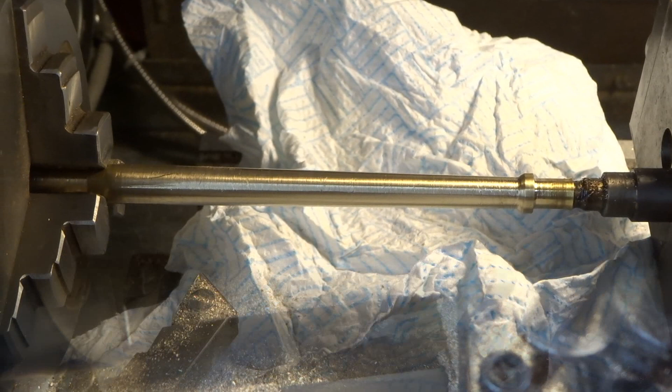Well, I'm not impressed with the finish, but I think for the moment I'm going to stop. Have a go at another one and see if we can improve. The tool's got a slight tendency to dig in and leave marks, which is not clever.

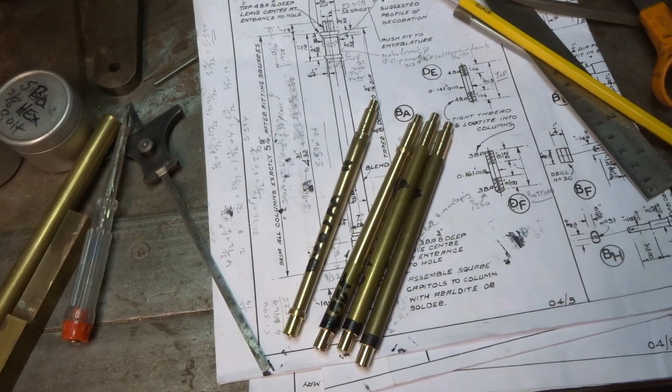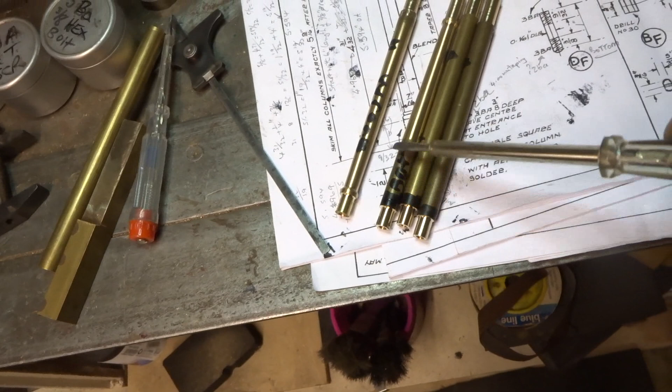Well, this is the point at which everybody can laugh like drains. That's the first one, and the taper is cut completely in the wrong direction. This is the second one, which actually I think the taper is about right, and I got confused as to which was the top and the bottom of these columns. In fact, there's a parallel section at the bottom, which is this bit, and the taper should go that way, not the way I've done that one.

That one's scrap. Okay, only another 3/4 of an hour of my life wasted while I try to figure out the setup. I give up for the day. I'm going indoors. It's freezing out here.

So now I think I'm cutting the column the right way round. That's the way I'm cutting the taper in the right direction. I don't know. Don't get old, you get senile.

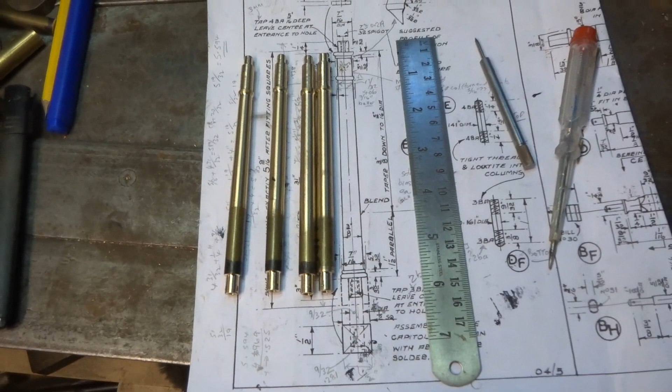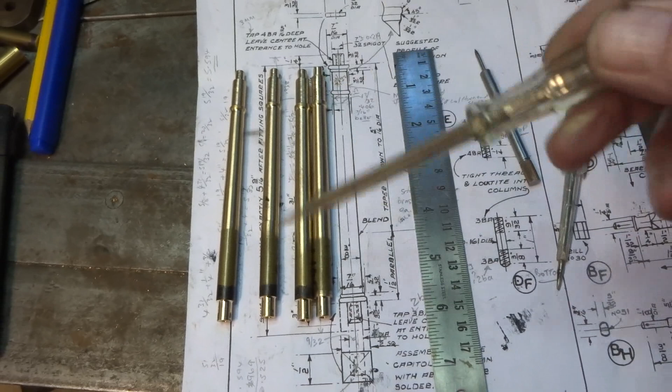Okay, I now have the basis of 4 tapered columns for this beam engine. They've obviously got to have some of the decoration turned up and sort of fitted on, but that's not a problem. Let's just hope they're right. I think they're pretty much within a couple of thou all the same length, so fingers crossed.

Okay, the 4 columns, they're not cleaned up yet and they're not perfectly trimmed to length, but we have the makings, I hope.

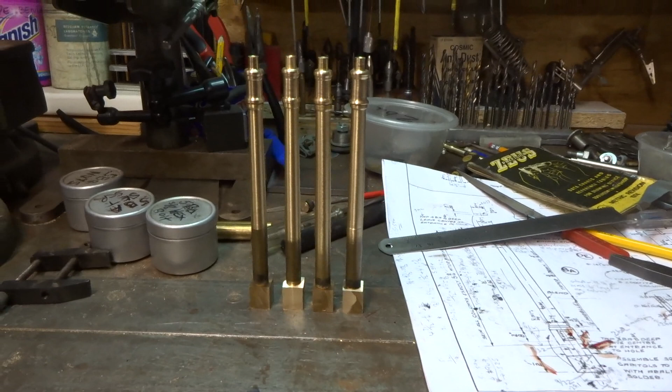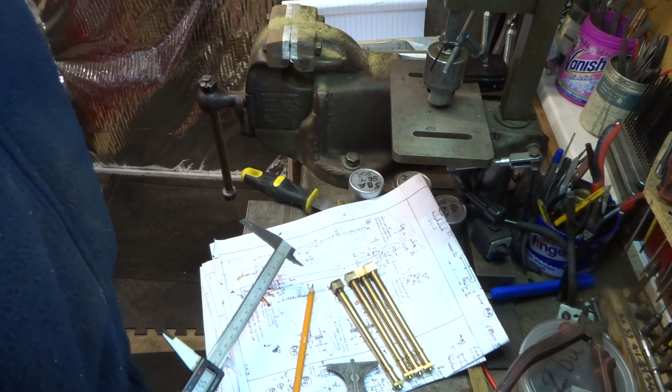I've roughed out, well, they're not that rough really, the columns for this beam engine, but I just need to check that the dimension from this point to the capital there is right. And by the drawing, if I've worked it out correctly, the dimension is supposed to be 5.562 inches. So we'll see how we get on, really.

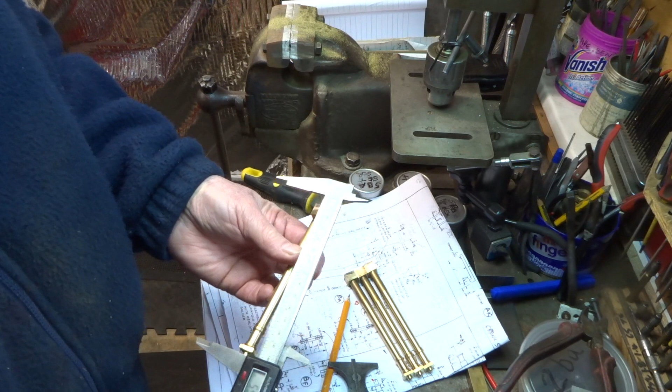I have to buy myself a better vernier. I don't like this one much. So that's 5.558, that's 4 thou short. Not the end of the world, I hope.

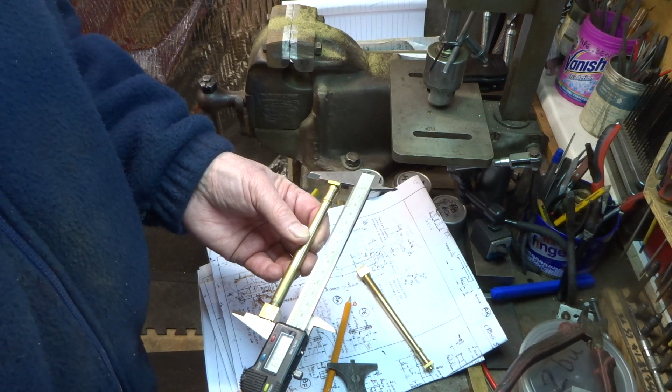That one's 5.558, again 4 thou short. That one's 5.564, so technically 2 thou too long and 4 thou longer than the other two I just measured.

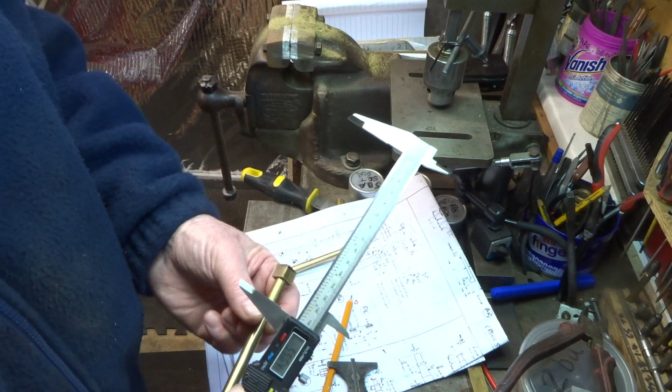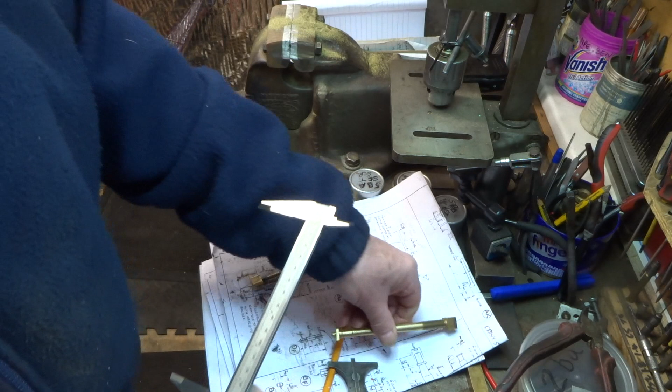And that one's 5.561, so 3 thou longer than the two shorter ones. I think the real question is whether I... God, I hate this vernier. Yeah, I think probably, I don't know, I'll take my life in my hands. I'll try and take about 4 thou off this one to bring it more in line with the other three. I think I'll do that.

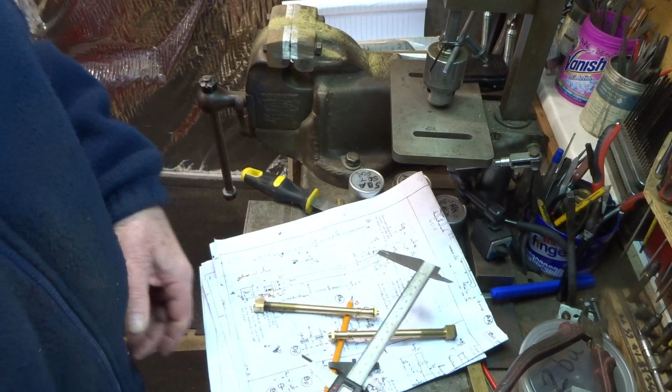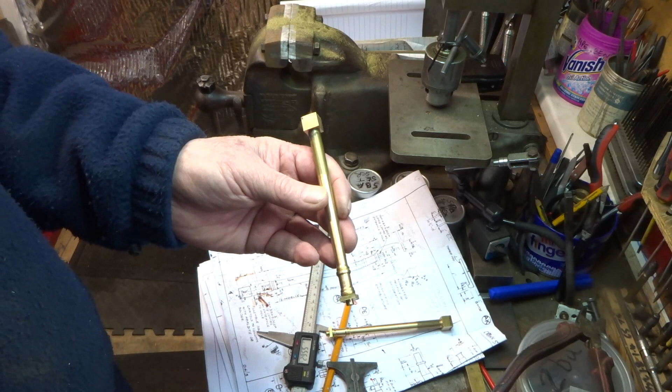Right, I've carefully touched up the end here. That's now 5.562, which is in theory the right dimension, so might be 4 thou longer than the others, but I'm not going to play about. I think I'll leave it at that before I mess up totally.

So I'm going to say the 4 columns are done, ready for erection, and if there's any slight issues on erection, then a little bit of shimming would correct that, I guess. But I think that's the limit of my ability, so I'm stopping.

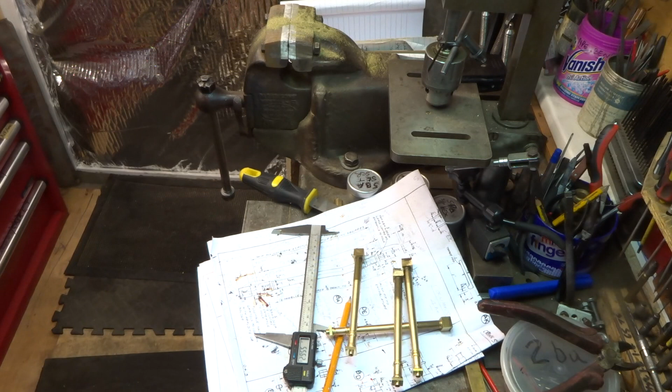At this point, I've made a slight variation to what I think the drawing says. Basically, I've drilled and tapped the base to this engine 5BA, so the holding down bolts for the cylinder and its plinth are tapped directly into the base, which I think is the way to go. I'm not too sure what the drawing intended. I think they kind of intended for bolts to come up from the bottom somehow and presumably be nutted or tapped on the top, but it seems nuts to me, so that's what I've done. I may yet change these holding down bolts for hex ones. I'll have to make them though, because I haven't got any of the right length.

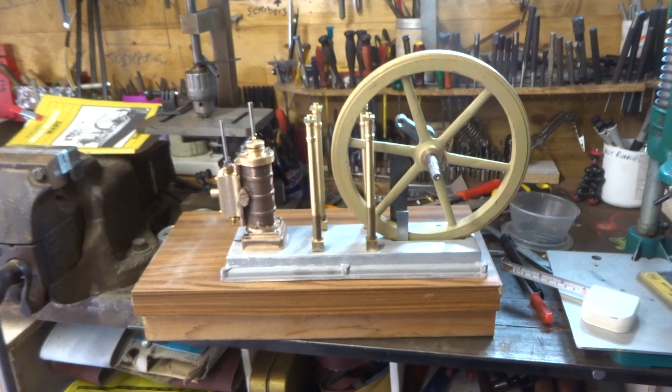This is just a rough check with things mostly just propped up, just to see where things go. It's unclear to me at this stage why the drawings call for a wooden base as thick as it does. It says 2 3/4 inches, but I don't know why, frankly, it needs to be that thick. So when I'm a bit further on, I might reevaluate that aspect of it. Anyway, for the moment, there's a temporary bit. The wooden base is 2 3/4. Well, actually, I think it's 3 inches thick, so we'll see.

I'm an idiot, because of course, having thought about it, the flywheel doesn't sit here. It actually sits outside this metal base, and there's a big slot needs putting in the wooden base, which is why I guess it's so thick, to drop the flywheel down. I think this temporary arrangement is more indicative of where things should be. This is one of the reasons I prop things up, just to figure out what's going where. So easy to start cutting and then discover you've done it all wrong, really.

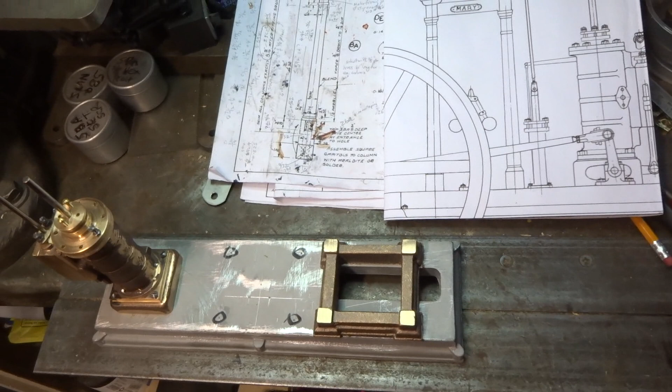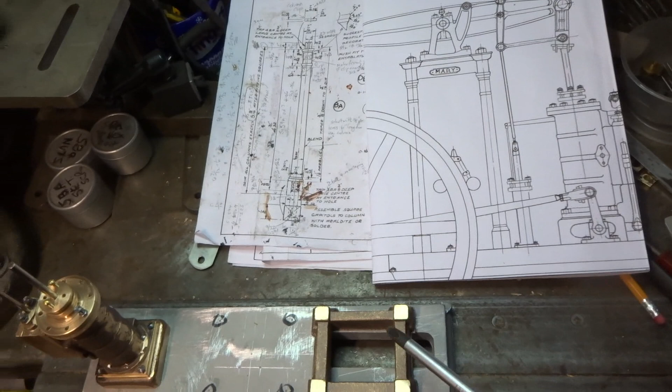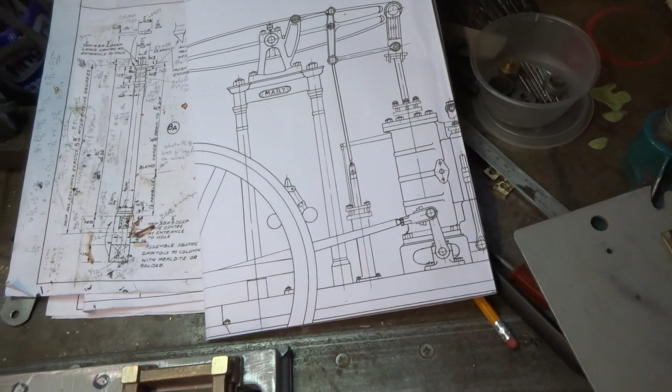The next part I think I'll tackle is to machine this entablature, which goes on top of the columns, so that I can erect the columns and fit that, because I like to see a bit of progress where you start to build bits of the engine. It sort of spurs me on a little bit. This part, I think, surprisingly, needs to be made, certainly its thickness needs to be fairly accurate, because if you mess it up, the length of the columns and the entablature will be all wrong, and I guess would completely mess up things like piston travel and valve travel and whatnot. So there's possibly a little bit more to this than meets the eye, but we'll see how we get on.

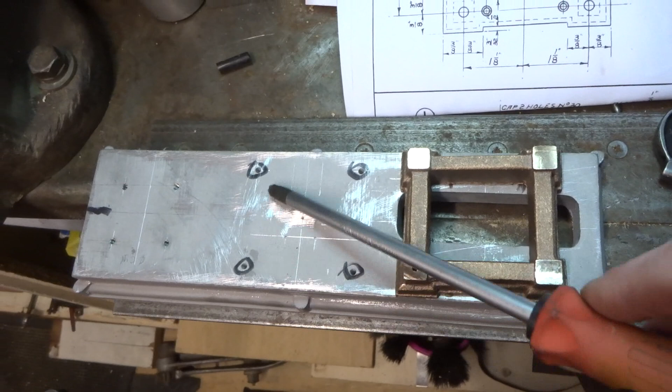I've machined the top of the entablature flat as a reference surface, and put a hole here compatible with the holes I've pre-drilled in the base. That will form the locating point where I'll drill through from the base into this entablature, so that all the columns are vertical.

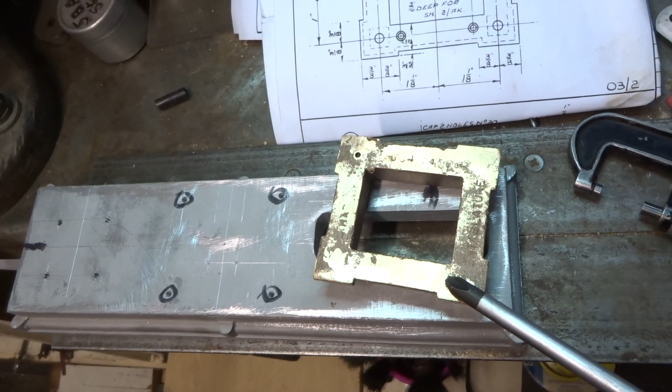If I've done my arithmetic correctly, and of course I may not, so I will need to check, but I think something like 90 thou total needs to be machined off this base in order to come to the 0.6875, i.e. 11/16 thickness dimension that is required.

A little bit of an aside. Initially I had the fluorescent lights running crosswise across the garage, but I found that in the vicinity of the lathe I had to turn the light around to run parallel, because it gives better light actually on the lathe. Just a silly thing really.

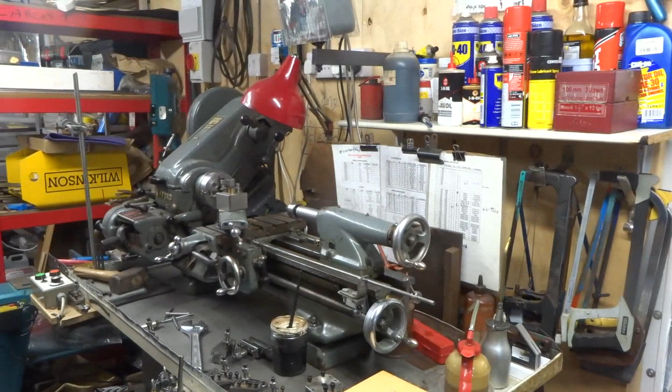Still a bit of a mock-up, but we are getting there, slowly.

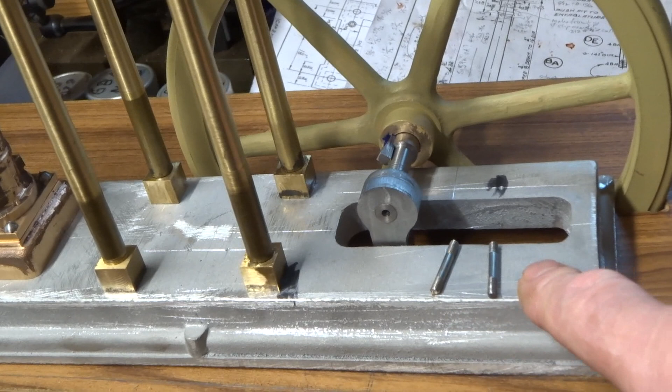So I'm running up 4 number 4BA studs, which will attach the entablature to the top of these columns. One stud's in, two are done, and I'll just show the setup on the lathe for doing this. It doesn't take many minutes at all.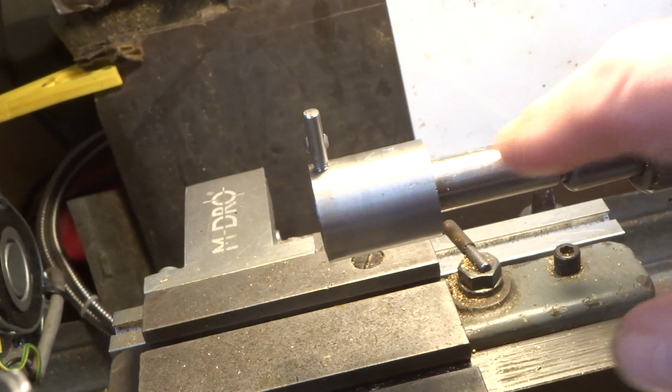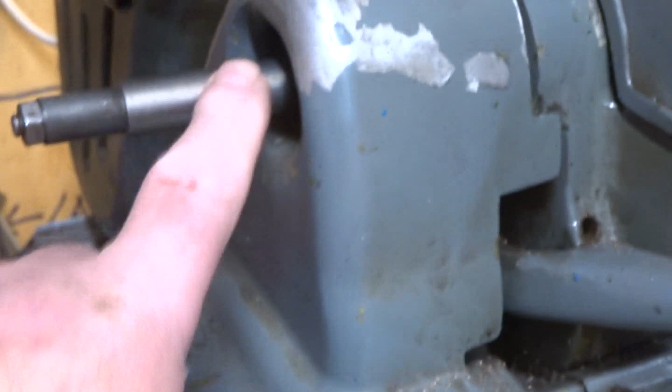So I use a collet chuck with a piece of steel with the appropriate length. This is my homemade tailstock die attachment, and I've made one of these for every size of BA die that I use, so I've got quite a batch of them really. The other thing I made a long time ago is a mandrel which just fits in the bore of the lathe spindle, and a homemade handle, which I can't do things one-handed really, but anyway, there you go.

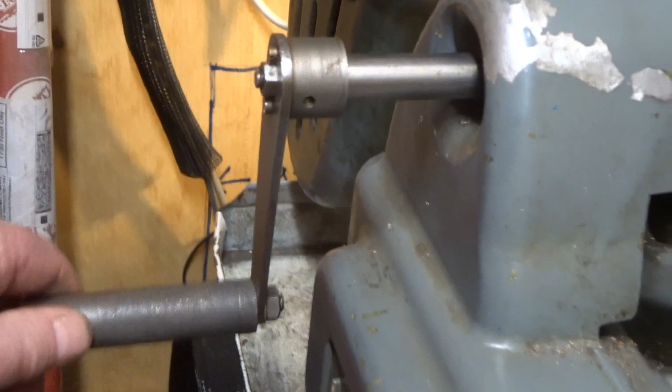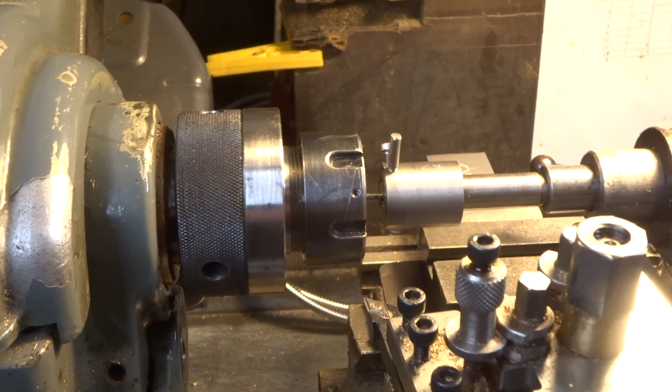So a handle to turn the chuck around, and then all you do is run the die holder up to the piece of work, and then frankly just turn the mandrel and count how many turns you want. In this case, for this end, it's going to be 10 turns, and all the studs turn out to have the same length and the same number of turns on them. It really takes longer to explain than to do.

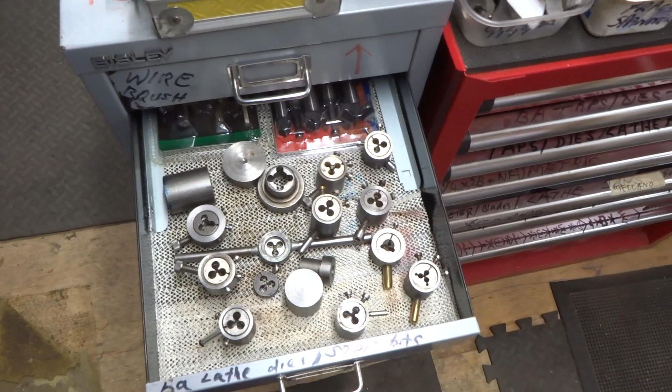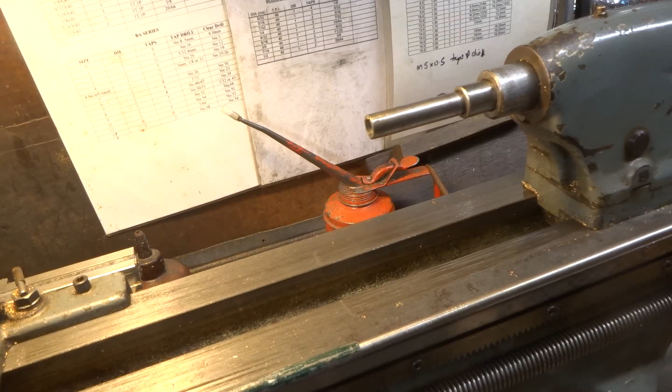And the die holders are just a decent fit on a mandrel which I made for the tailstock. It's a real time saver.

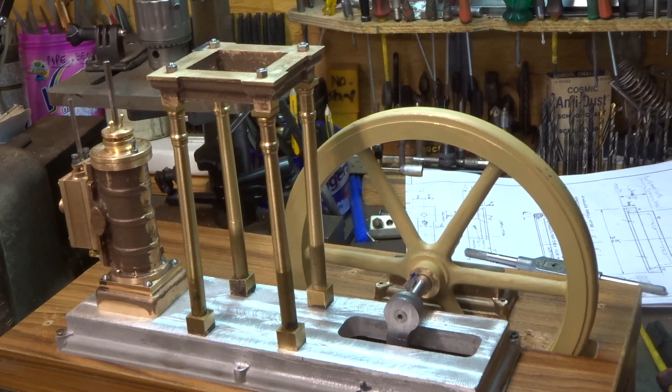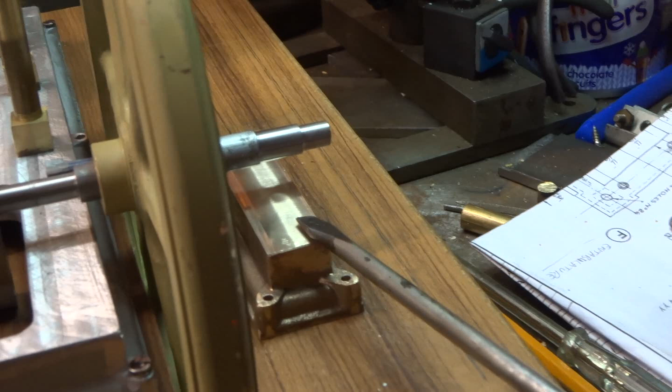I'm going to call it a day for this phase of the video. The base is machined - not screwed down at the moment, but the columns are erected and the top is kind of level, the cylinder's in place, the flywheel's just propped up. Importantly, I've machined up the base, which will be the support for the outer bearing. It's not fixed down, the holes are not located as yet, because until I make the bearing I'm not too sure where that's going to go exactly. Presumably the bearing fits here, but we'll wait and see.

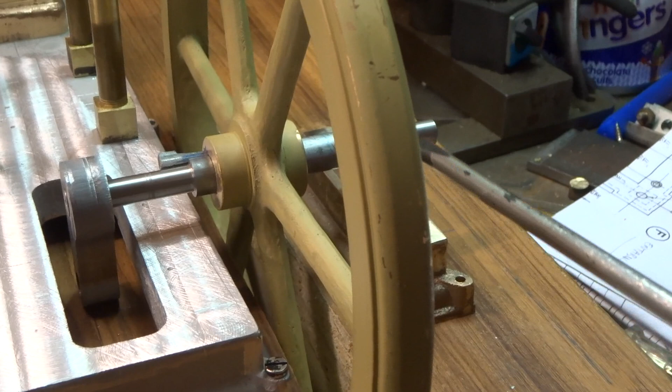So I need to make the outer bearing for the crankshaft, and I call this the inner bearing for the crankshaft. Fit the bearing here, put the crankshaft in, and then just check that everything will line up this side. But that'll be the next stage of operation really.

So that's it for part 3 of the 4-column beam engine build. If I haven't already bored you to death or you've nodded off, watch out for part 4 of this build in due course - probably after Christmas now. Other things are beginning to take precedence. Thanks very much for watching. Cheers.